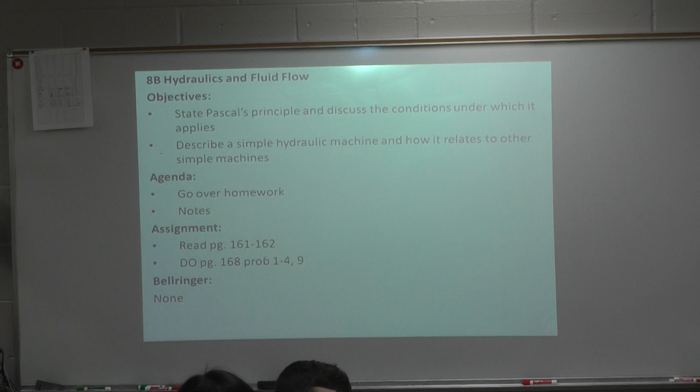We're going to read, before we talk about Pascal's principle, we're going to talk about one of the cooler creations that God has created, known as the octopus.

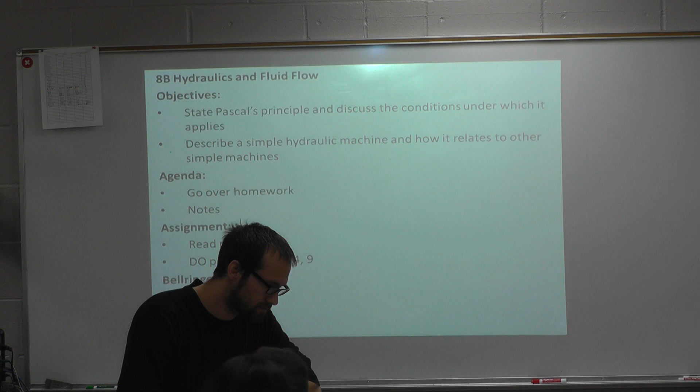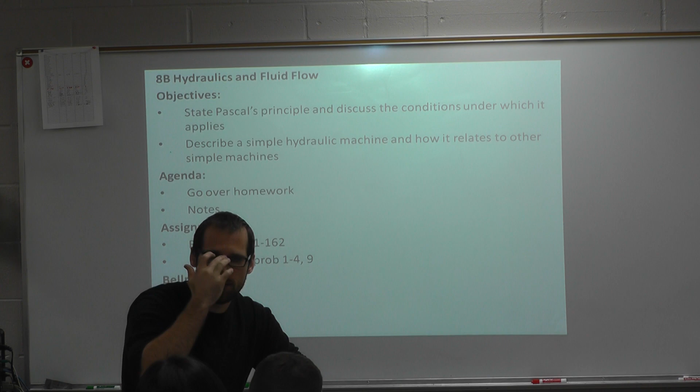Octopus? Octa, eight. Food is also ethnic. Ethnicity is just people groups. Yeah, a people group created a food, right? So isn't all food ethnic? But God created the octopus, and the octopus is not ethnic.

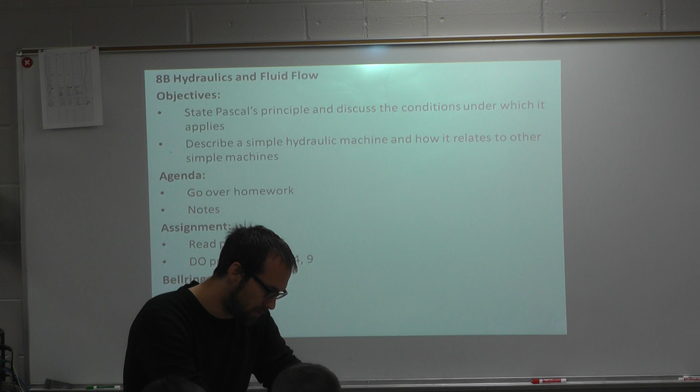It says the octopus is among the most intelligent invertebrate animals. It also has excellent eyesight and sophisticated defense mechanisms. You can shoot rockets, okay. One of these mechanisms is the ability to move rapidly away from harm using a process similar to that of a rocket engine. The octopus draws water into its internal cavity and then rapidly shoots the water out through its siphon, a tube-like structure. The muscular force exerted on the water in the cavity is used to accelerate the octopus.

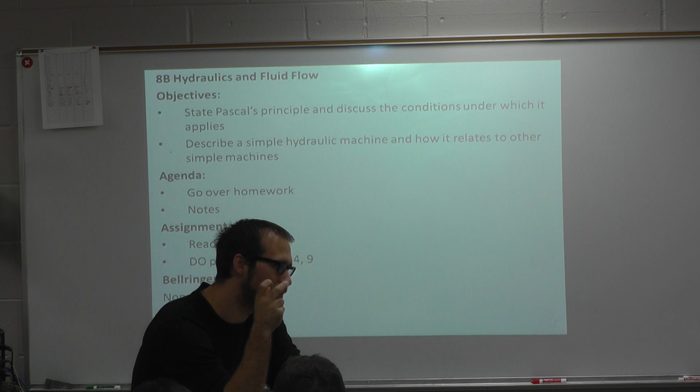This action is similar to squirting water out of a full sports bottle. The force applied to a contained fluid in one location is transmitted through the fluid to another location. So the force that it shoots the water out gets transmitted through that siphon-like tube and propels him forward through the force applied on the water.

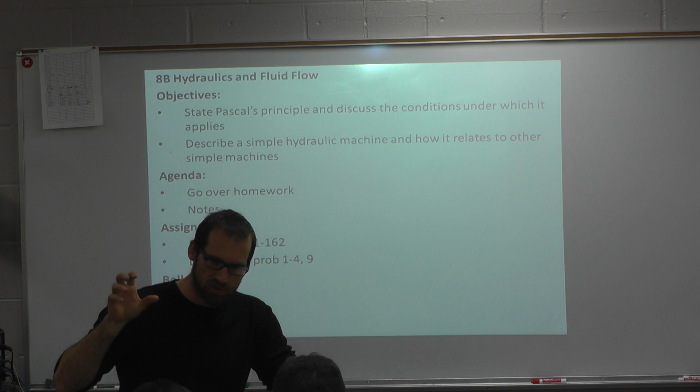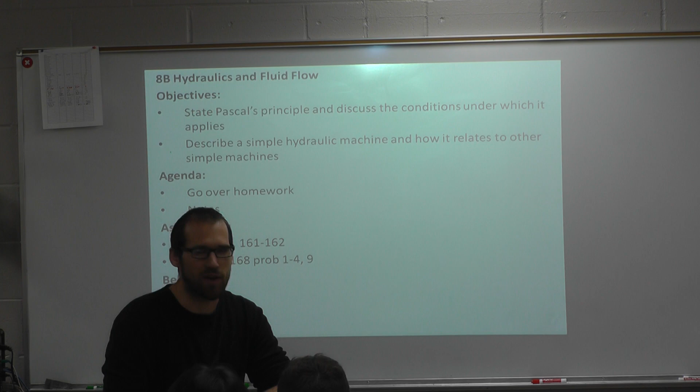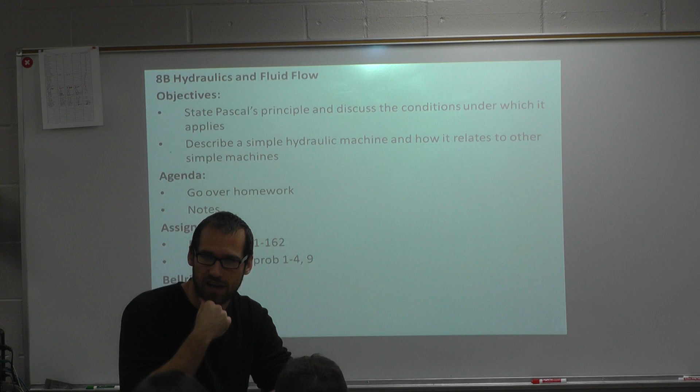Similar to when a rocket shoots off, okay? The rocket shoots off a bunch of energy downward, and due to Newton's third law, what pushes back on the rocket? The air. Did you guys realize that when a rocket shoots off, like it shoots stuff downward, why does it go up? Because of Newton's third law, every action has an equal and opposite reaction. So the rocket pushes down on the air, and the air pushes back on it, causing it to propel upward.

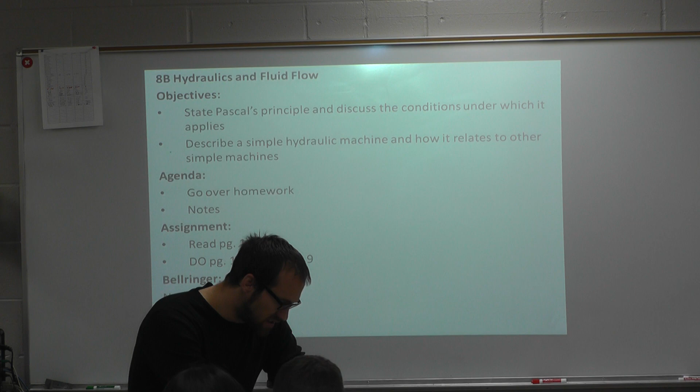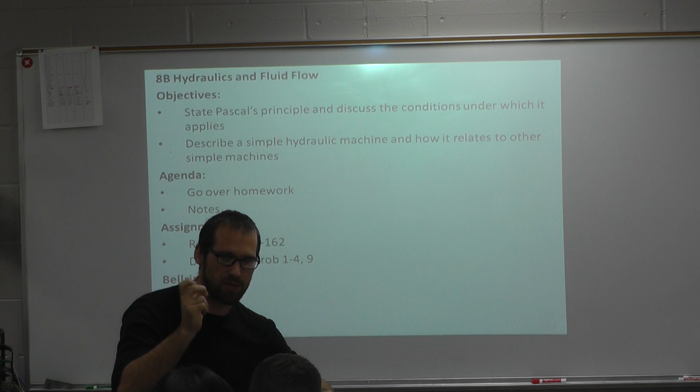A relatively small amount of water that filled the long tube above the cask provided enough pressure to burst the cask's staves. Basically that was an enclosed barrel, and what did we say primarily determines water pressure? Depth, okay? So height and depth are kind of interchangeable here. Does that make sense? So it didn't matter how much volume was above it, all that mattered was how high it was above it. And pressure and force is distributed throughout the whole volume of the water.

Let's keep reading here. From his experiment, Pascal reasoned that changes in pressure on the surface of a confined fluid are exerted equally throughout the fluid at all points in the fluid. So if I apply a pressure on the top, it gets distributed all the way through the fluid and at all points of the fluid. Okay, this statement is known as Pascal's principle.

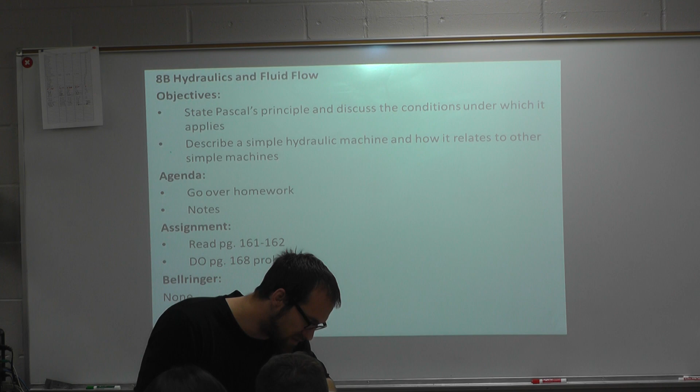However, there are several conditions that must exist for his principle to be true. First, the fluid must be confined in a completely enclosed container. If it wasn't completely enclosed, wouldn't the fluid be able to leak out in some way, shape, or form, and that would change the pressure a lot? If not, any change in pressure would cause it to move out the opening, similar to a sports water bottle. Second, the fluid must also be incompressible. Why?

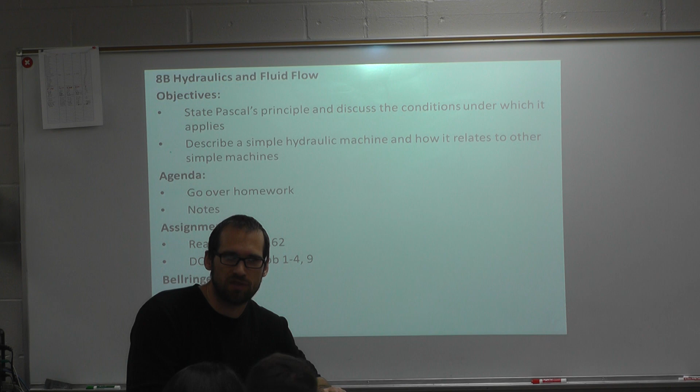Wouldn't increasing the pressure of something that could be compressed just change the volume?

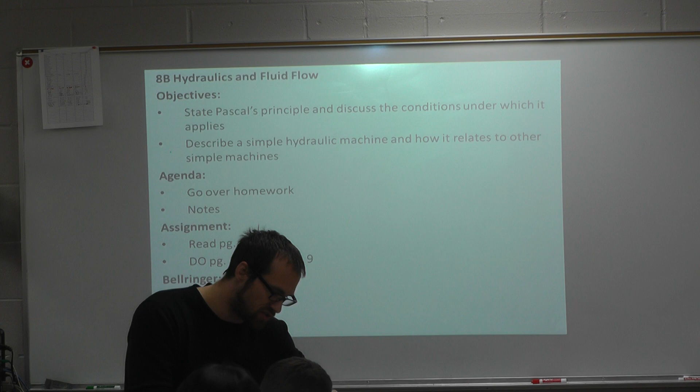We'll find out there's a relationship between pressure and volume later in this chapter. In other words, a fluid cannot absorb pressure changes by allowing its particles to be squeezed closer together. For practical purposes, the only real fluids that approach these conditions are liquids. Gases are far too compressible to completely obey Pascal's principle.

So your first notes are his principle and then the conditions that must be met for his principle to be true. We only have one more slide after this. We're done.

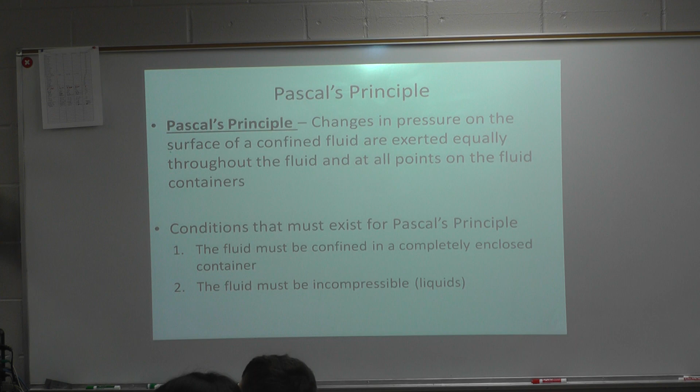Nice having your own kitchen in here, huh? I'm gonna make some ramen with that. I do what I want. This is forte. Okay.

This is an application of Pascal's principle. I'm going to show you how this works. You guys know what hydraulic machines are.

Anybody give me an example of a hydraulic machine? Hydraulic press. Okay, what is that used for? Crushing, okay.

Anybody ever work on their car? Probably not, you don't even have a car, do you? Seen a parent work on their car where they have to use the jack to lift it up? When you lift up a car, don't you exert a force to essentially lift up the car?

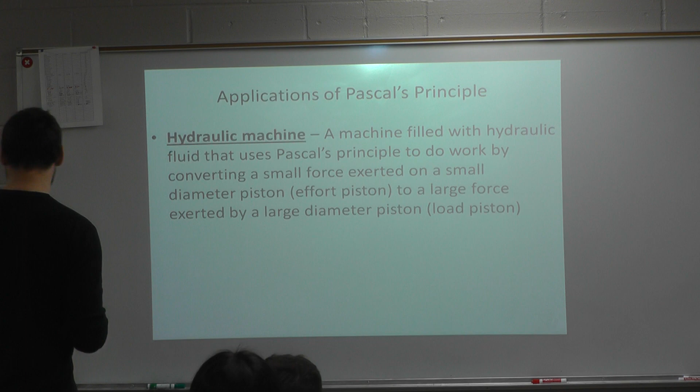I'm going to try my expert drawing skills since I'm really good at drawing. Yes? What is it to you? Everything. I don't know, but I'll show you.

Alright, so I'm going to draw up here. You're probably going to want to draw this as well. I'll do my best to draw a decent looking picture here. Wow. Something along the lines of that. Yeah, it's in the book.

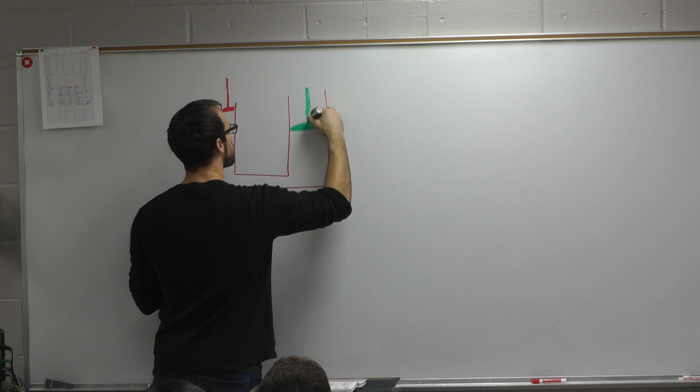And we're using this to lift some object, we'll call it a car. It's a truck, whatever. There you go, and I'll pop the door back. Perfect, okay?

And then what we have in here is fluid, okay? There is specific hydraulic fluid. Usually the specific fluid they use for hydraulics doesn't have a lot of friction, because if you use a fluid that's really good at flowing, it does not have a lot of friction, you're not going to lose some of your energy, right? Because we know energy is never created or destroyed, but it can transfer from one form to another. So if it's lost in the form of friction, it's not going to be used to do work. Does that make sense? Okay?

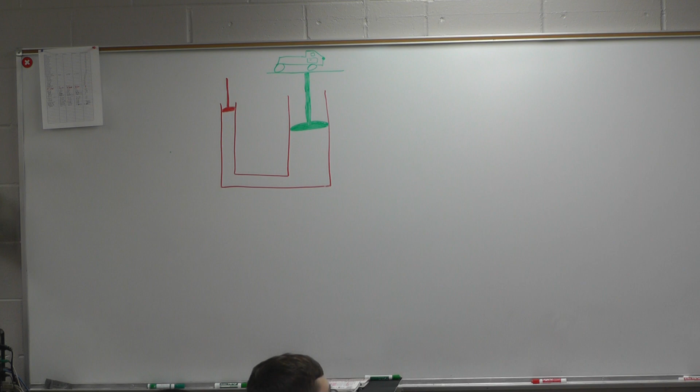Now, we said that for Pascal's principle to be true, what two things need to be the case here? It must be enclosed, okay? So in this particular hydraulic system, I've got fluids in here, okay, is it enclosed? What's the second thing? It must be incompressible, so we need to use pretty much a liquid, okay?

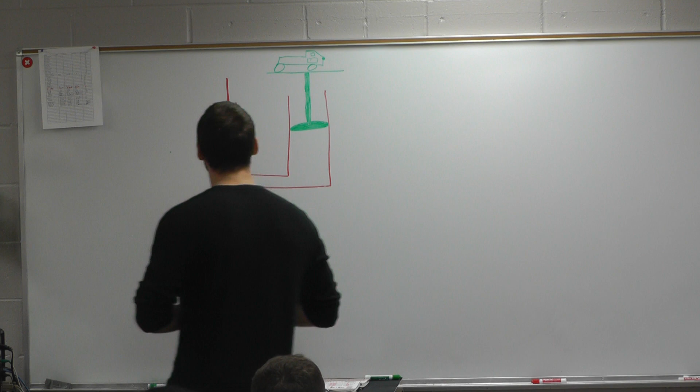A piston, it's hard to describe without just using a visual. That's a piston and that's a piston. How do you describe a piston?

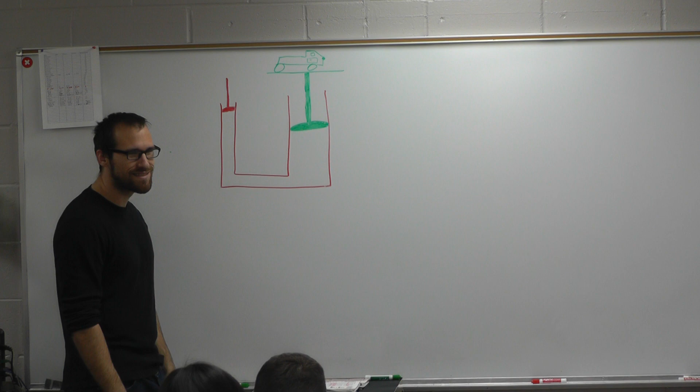Like Google it. Have you ever seen a syringe like this? The little thing slides up and down and squirts the fluid out the end. That's a piston. It's basically something enclosed that can slide up and down, so it's not fixed.

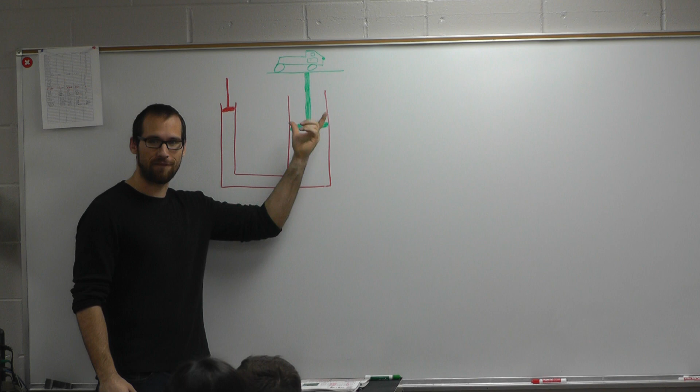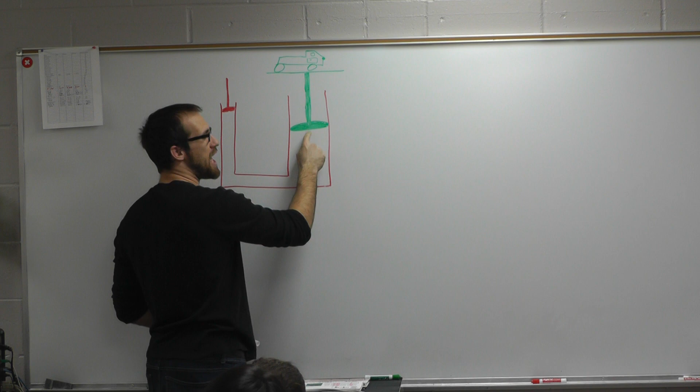So I'm going to push on this and it's going to slide down the piston. If I have fluid in here and I apply a force on this, since this is an incompressible fluid, what's going to happen to this piston? It's going to go up. So this piston is going to go down, this piston is going to go up.

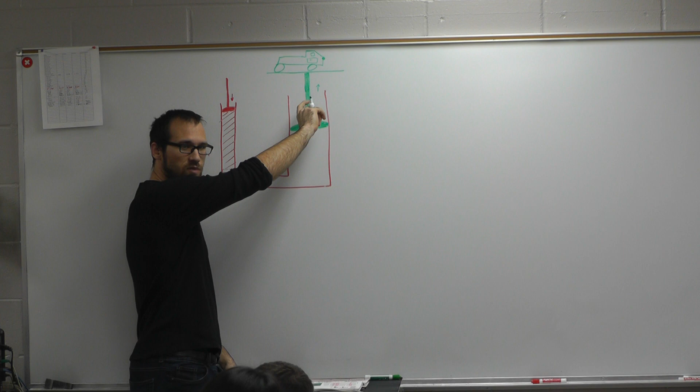So what I'm going to do is take this piston and push it all the way to there. Now that piston is going to displace some fluid, right, which is going to cause this to go up. There is an area here, we'll just call that A1. That's going to be equal to the amount that this is displaced. Now notice how this is a bigger piston.

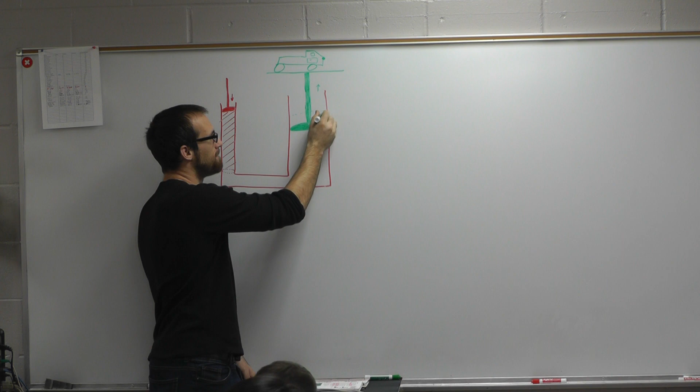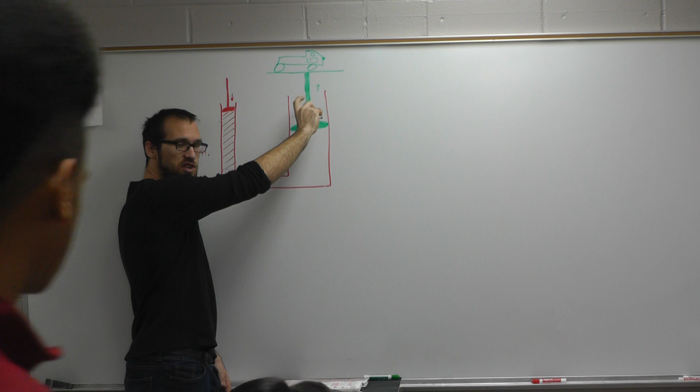So is it going to rise as far? No. So let's say it rises to like here. But did the volume of this and the volume of this stay the same? Does that make sense? Because what I displace here is just going to be the change over here. It's just going to look a little different because this is a smaller piston and that is a bigger piston. Does that make sense?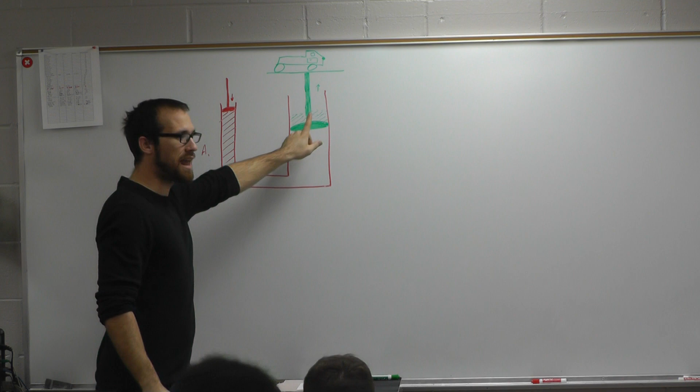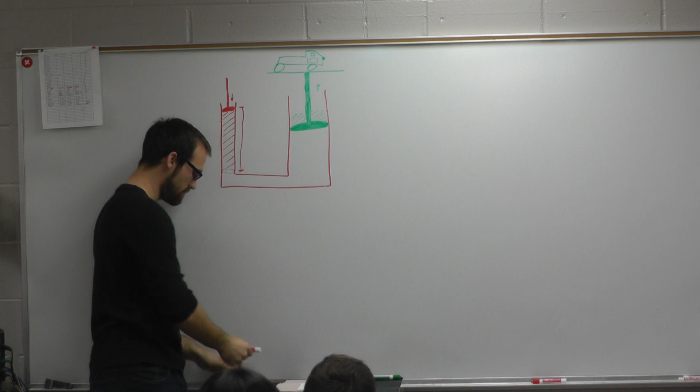So what we have is our change here. Now, we know that if I apply a pressure here, I'm going to get a pressure there. But notice how far this piston moves, from here to here. Make sense? And notice how far this piston moves.

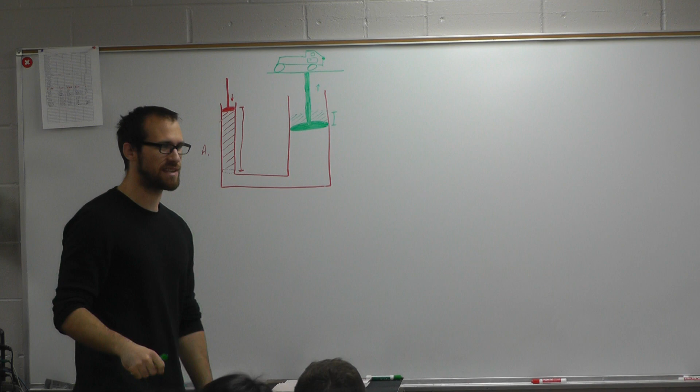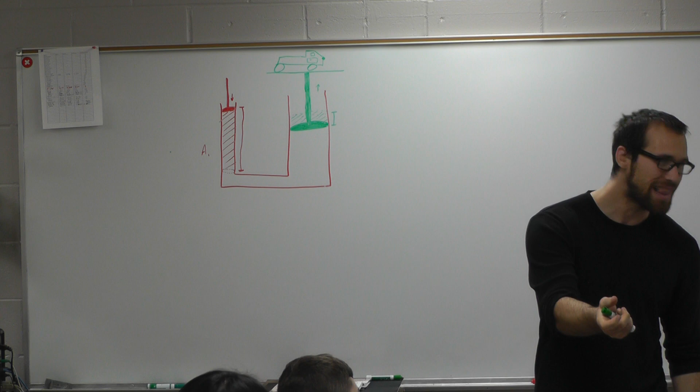What do you think we're using? A simple machine. And what principle do you think we're applying here? The distance principle. So if anybody ever jacked up your own car, you're just like, and the car's barely moving, right? That's because you're moving a long distance. You're only getting a small distance out, and the reason why is so that your force is less.

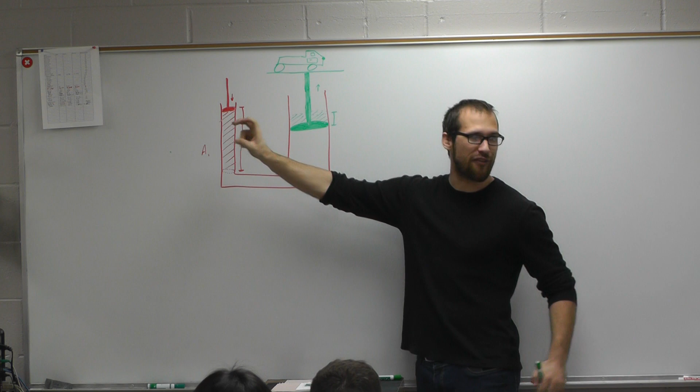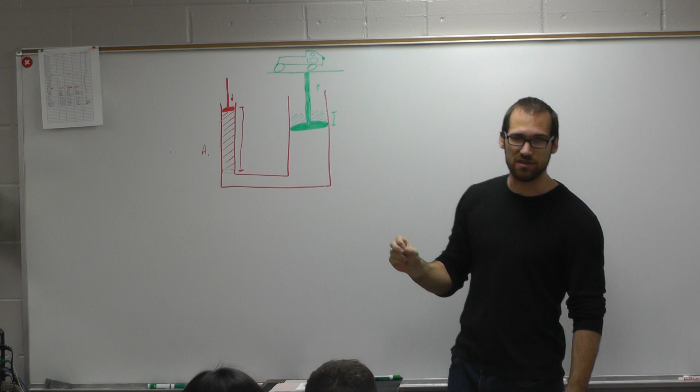So that is exactly how hydraulics work. They just use the fact that in a liquid or fluid, the pressure I apply here gets transmitted all the way through the liquid and up to the other side. So they use the properties not only of a simple machine, but also the properties of fluids with its ability to transmit pressure and forces in all directions through the fluid. So there's a lot of applications for pistons. It's really just a modification of a simple machine, right?

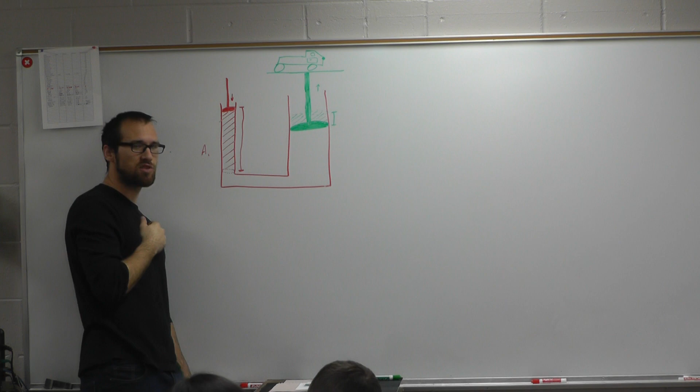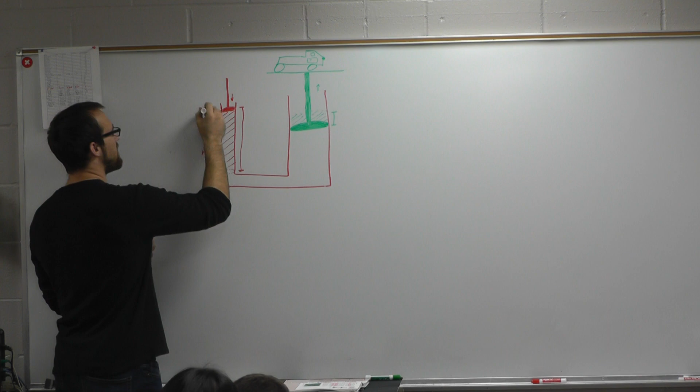Now, the more distance this moves, the less distance this moves, the easier it becomes. So usually the effort piston is bigger or smaller than the resistance piston. It needs to be smaller. So this is our effort piston, this is our resistance piston.

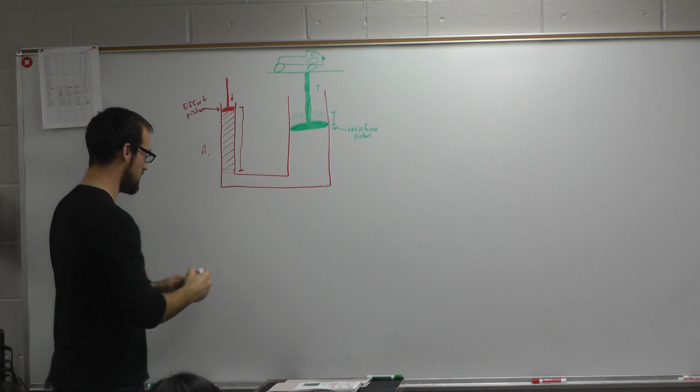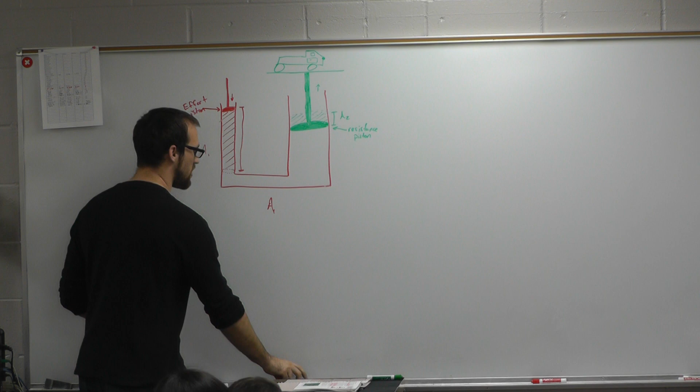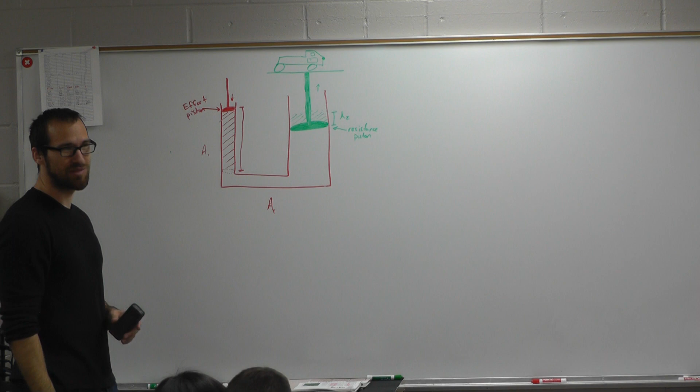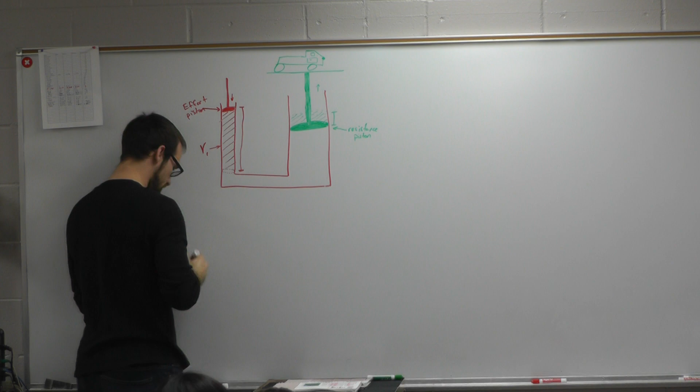The area A1 should be equal to the area, or volume — I should say volume instead, that's better, because it's the area of the pistons times the height it moved. Area times distance or height is what? Volume. So I'm going to say volume instead, that's a little bit better. So we'll say V1, V2, and they should equal each other.

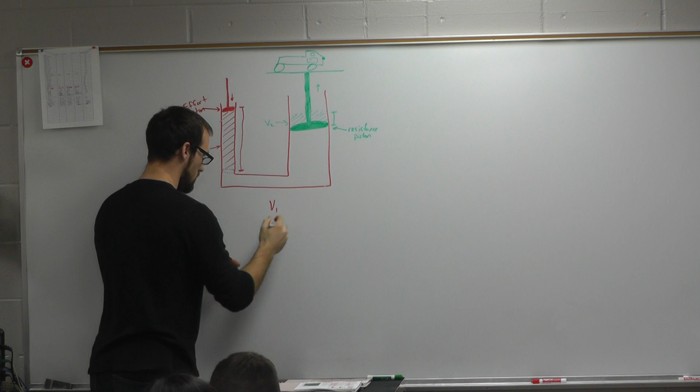So how hydraulic machines work is you have different sized pistons. The smaller piston has to travel a lot further than the bigger piston does, using the distance principle to make work what?